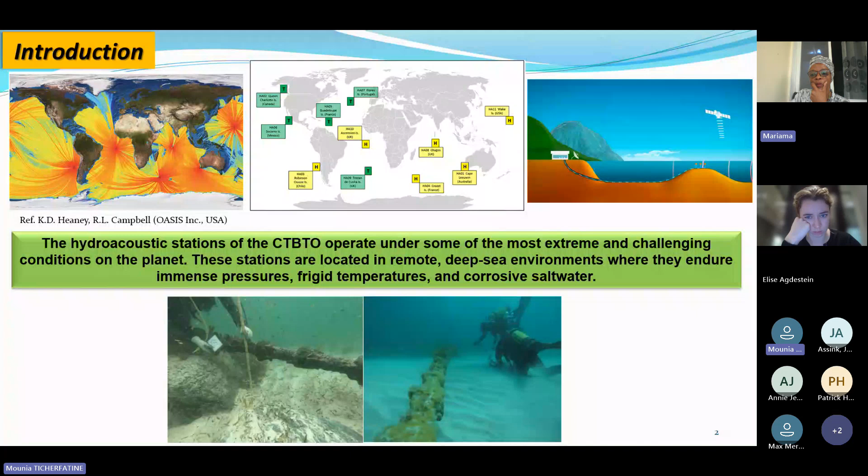Therefore, sustainment actions are crucial for preserving the operability of the CTBTO's hydroacoustic stations. Most importantly, regular maintenance, timely repairs, and technological upgrades ensure that these stations continue to function effectively, providing accurate and reliable data. So it is only by addressing this area that the CTBTO can maintain the integrity of its global monitoring system, ensuring continued compliance with the comprehensive nuclear test ban treaty and contributing to international security.

Of course, these sustainment activities are conducted in relation to the on-land outside plant equipment and the underwater system.

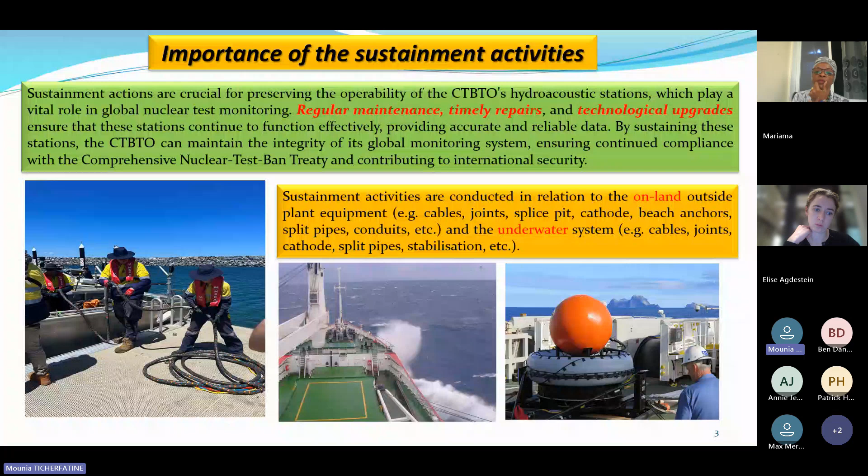So here we address the problem of corrosion. According to our understanding, corrosion remains the most challenging condition faced by the hydroacoustic stations. Indeed, the accelerated degradation caused by corrosion poses a severe threat to the structural integrity and operational reliability of the stations. Traditional materials and protective measures are proving insufficient in this hostile environment, making the development and implementation of advanced coating materials imperative. These cutting-edge coatings must be engineered to provide exceptional resistance to corrosion, ensuring the long-term durability of the station. So it is by addressing these challenges that we can secure the continued functionality and effectiveness of these vital components in global nuclear test monitoring.

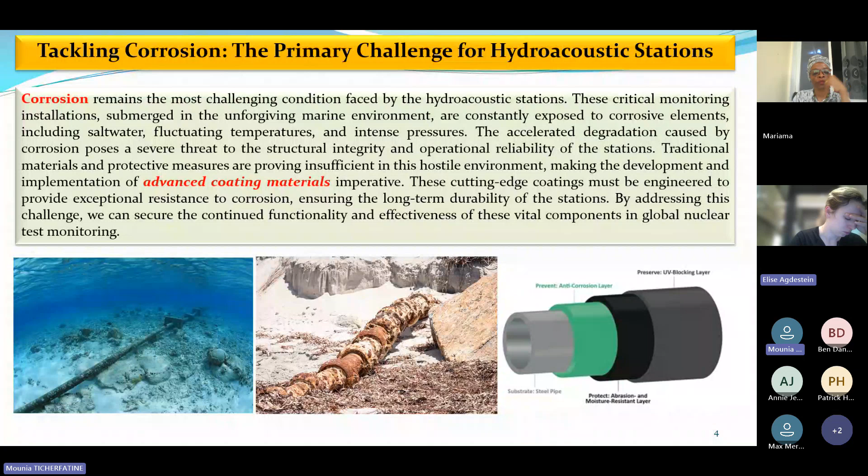Now, let's talk about superhydrophobicity and the role of superhydrophobic coatings in addressing corrosion issues. Superhydrophobic coatings are characterized by their extreme water-repellent properties, offering a promising solution to the pervasive corrosion issue in hydroacoustic stations. Typically, these coatings create a surface that minimizes water contact by causing water to bead up and roll off, significantly reducing the likelihood of corrosion-inducing moisture accumulation.

This water-repellent behavior is crucial in marine environments, where constant exposure to salt water accelerates the corrosion of submerged structures. In addition to water resistance, superhydrophobic coatings can also reduce the adhesion of marine organisms, such as barnacles, which contribute to biofouling and further exacerbate corrosion. So by preventing both water ingress and biofouling, these coatings can enhance the durability of hydroacoustic stations, extending their operational life and reducing maintenance costs.

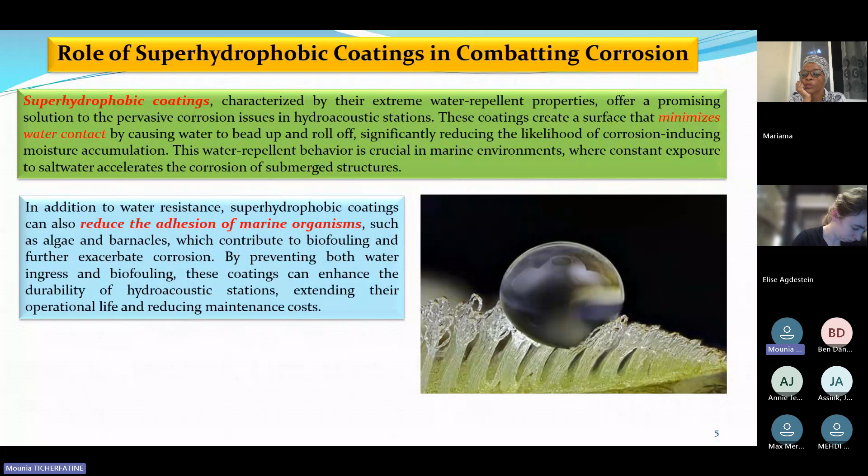So now let's discuss the science behind it. What is superhydrophobicity? Superhydrophobicity is closely related to the water contact angle, the WCA, defined as the angle where a liquid-vapor interface meets a solid surface. According to the WCA value, we can define if a surface is superhydrophobic or not.

For instance, in the upper figure here, the surface is superhydrophobic when the WCA is between 150 and 180 degrees. It is hydrophobic if the WCA is between 90 and 150 degrees. And less than 90 degrees, it is hydrophilic or superhydrophilic.

Superhydrophobicity was initially discovered in nature, as we can see here from the SEM image in the bottom left. We can see superhydrophobic surfaces at low and high magnification of a lotus leaf. Here we have a WCA of 162 degrees, which is a superhydrophobic surface.

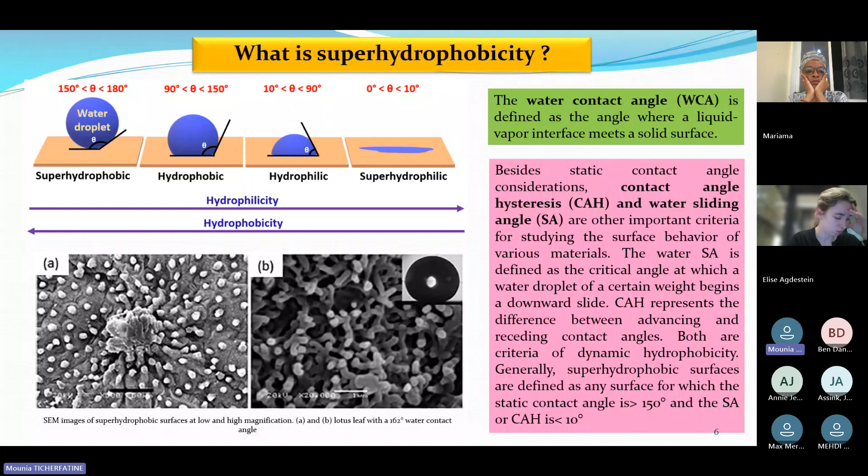Now, how is this superhydrophobic surface fabricated? Surface chemical composition and surface roughness are the key factors contributing to the formation of superhydrophobic surfaces. There are many methods and techniques to create roughness, followed by modification to achieve superhydrophobic surfaces, such as templating, etching, hydrothermal synthesis, anodization, electrodeposition, and most importantly, nanocomposite spray coating.

Nanocomposite spray coating offers a cost-effective method for creating superhydrophobic surfaces. By using advanced nanomaterials, this technique achieves high-performance water repellency at a low cost compared to the other methods. It provides an efficient and economical solution for developing durable hydrophobic coatings across various applications.

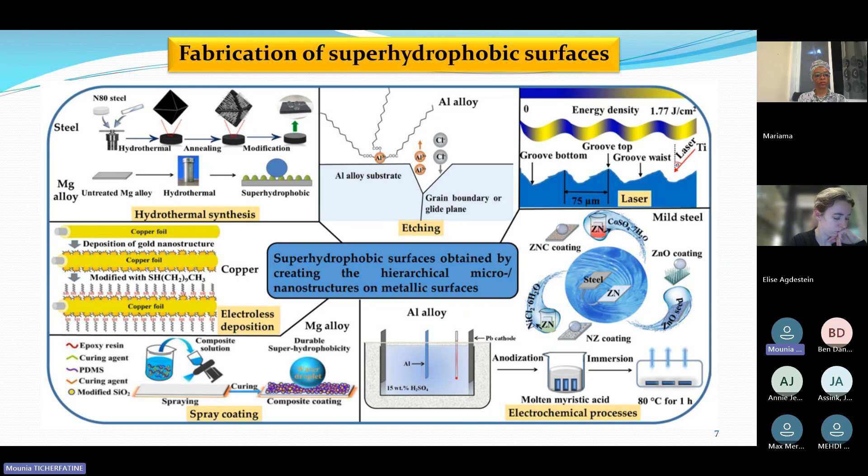Let's now move on to the specific case study we performed recently. As I stated in the previous slide, the nanocomposite spray coating can be seen as the most adequate and cost-effective technique to achieve superhydrophobic coatings.

In this case, a new nanocomposite was developed using a high-performance phthalonitrile resin and surface-modified titanium oxide nanoparticles. The phthalonitrile resins are considered one of the most advanced thermosets, featuring exceptional thermal stability over a wide range of temperatures, very low water uptake, a high cross-linking degree, and most importantly, a low melt viscosity and large processing window, which allows the preparation of nanocomposite through the spray coating technique.

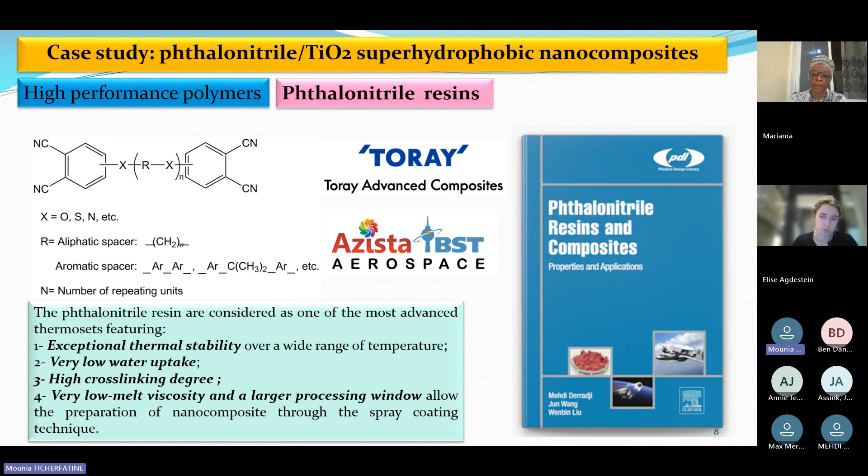Here, the phthalonitriles are synthesized by a simple nucleophilic displacement of a nitro substituent activated by the cyano functions. A multitude of possibilities are available by changing the phenolic precursors in order to tailor the final properties of the polymer. Meanwhile, the use of environmentally friendly precursors like eugenol, cardanol, among others, allows the development of biopolymers displaying the same or better performances than their petroleum-based counterparts.

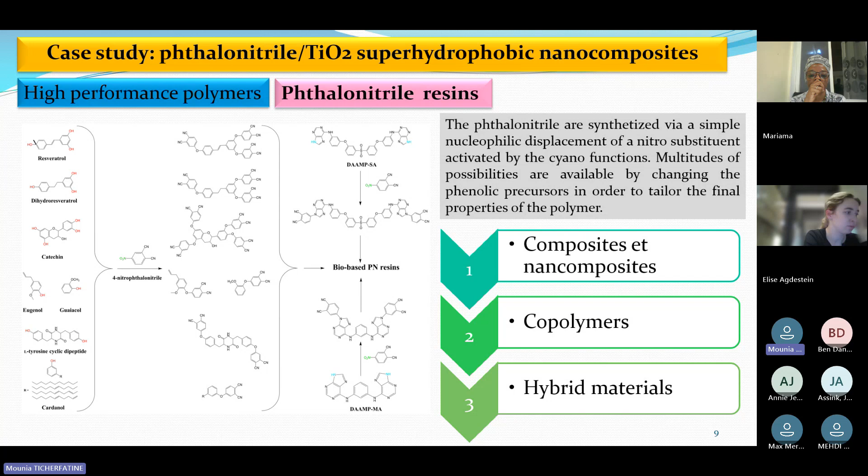Prior to the nanocomposites preparation, a chemical surface modification is applied to the titania nanoparticles to improve their adhesion and dispersion within the polymer. The silane surface modification of titania nanoparticles also enhances surface hydrophobicity by bonding hydrophobic organic chains to the nanoparticle surface. The silane molecules react with hydroxyl groups on the titania, forming a hydrophobic layer that repels water. This modification reduces the surface energy of the nanoparticles, leading to decreased wettability and improved resistance to moisture.

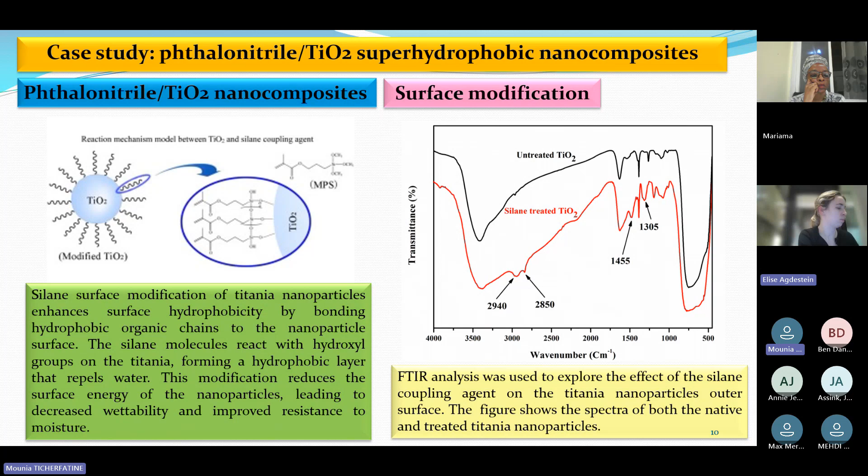Here, nanocomposites were prepared by adding the necessary amount of the treated nanofillers, ranging from 2 to 6% in increments of 2%, into a glass vessel containing a dissolved phthalonitrile resin. To assure better dispersion of the titania nanoparticles, the mixture was vigorously stirred using a mechanical agitator and then sonicated. The selected substrate used to assess the corrosion protective properties was a carbon steel panel. The deposition of the nanocomposite mixture was performed by a spray coating process. The final thickness of all coatings was about 120 micrometers.

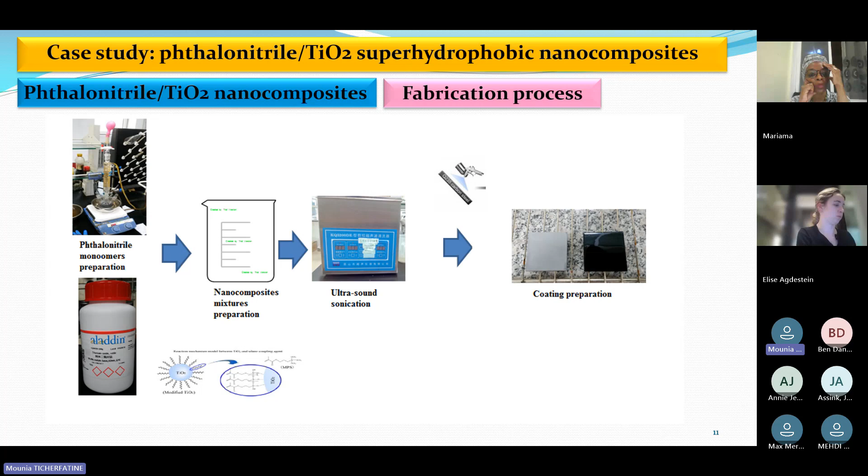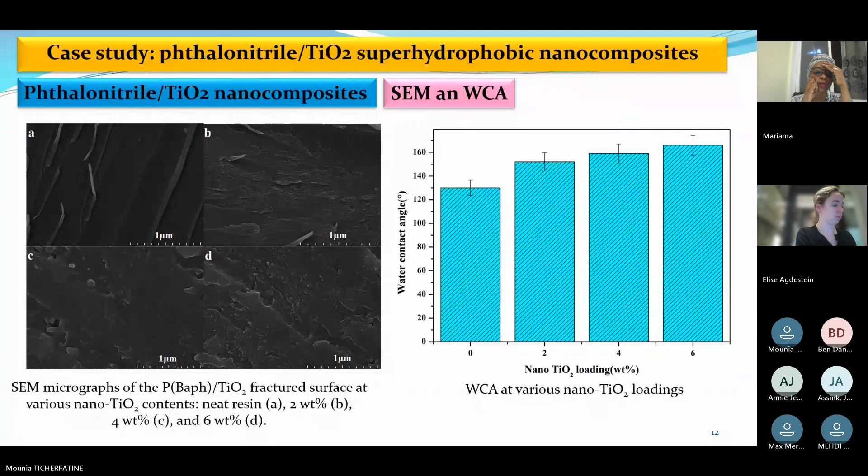The corrosion protective properties of the nanocomposite coating were tested using electrochemical impedance spectroscopy, EIS, measurements, which were performed on a potentiostat in a conventional 3-electrode cell. These measurements were taken at different immersion times over a frequency range of 100 kHz to 10 mHz.

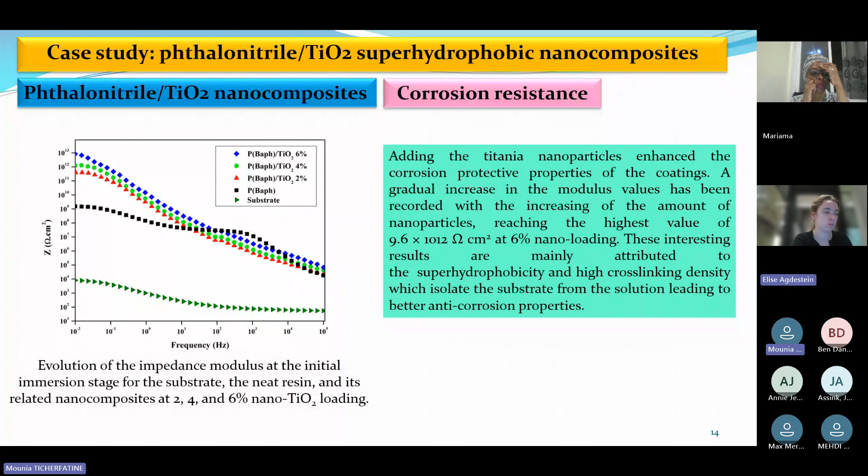The evolution of the impedance modulus at the initial immersion stage for the substrate, the neat resin and its related nanocomposites at 2, 4, and 6% nano titania loadings is presented in this figure. The findings showed that adding the titania nanoparticles enhanced the corrosion protective properties of these coatings. A gradual increase in the modulus value has been recorded with increasing amount of nanoparticles. These interesting results are mainly attributed to the superhydrophobicity and high cross-linking density, which isolate the substrate from the solution, leading to better anti-corrosion properties.

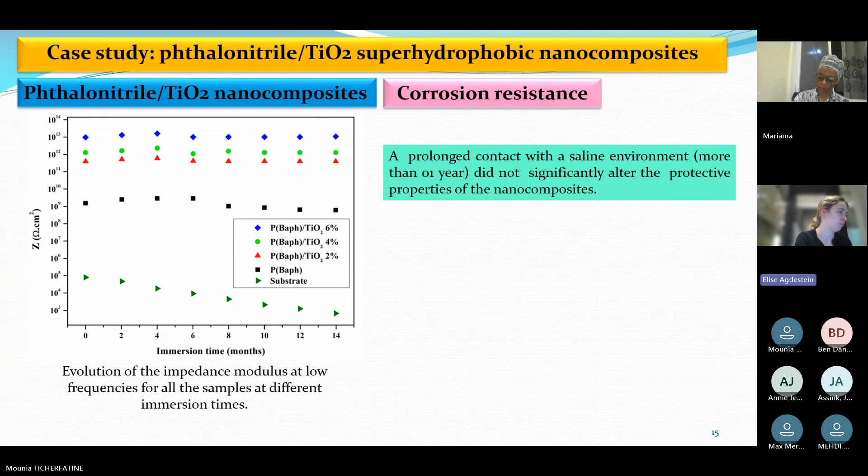Here, the mechanical resistance was investigated because in deep sea environments, materials are subjected to extreme conditions, including high pressure, corrosive seawater, and potential abrasive interaction with particles or marine life. So a coating with high microhardness is generally more resistant to deformation under pressure, which can be advantageous for maintaining the structural integrity of the material it covers. Different nanocomposites showed much improved microhardness values as the amount of titania nanoparticles increased. In fact, the maximum microhardness value, reaching 500 megapascals, has been recorded at 6% of nanofillers.

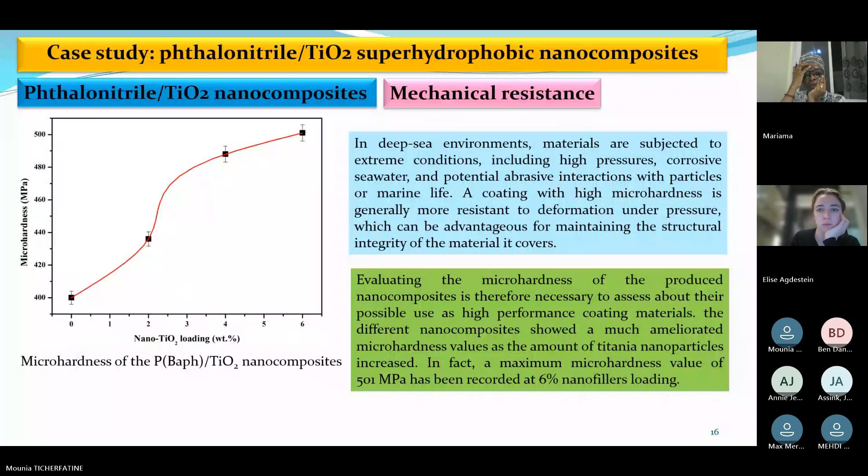Also, thermal properties were investigated, since coating materials for deep sea applications must endure extremely low temperatures while maintaining their structural integrity. Thermostability performances assessed by thermogravimetric analysis confirmed that the nanocomposite coatings retain their structural integrity over a wide range of temperatures from -50 to 500 degrees Celsius.

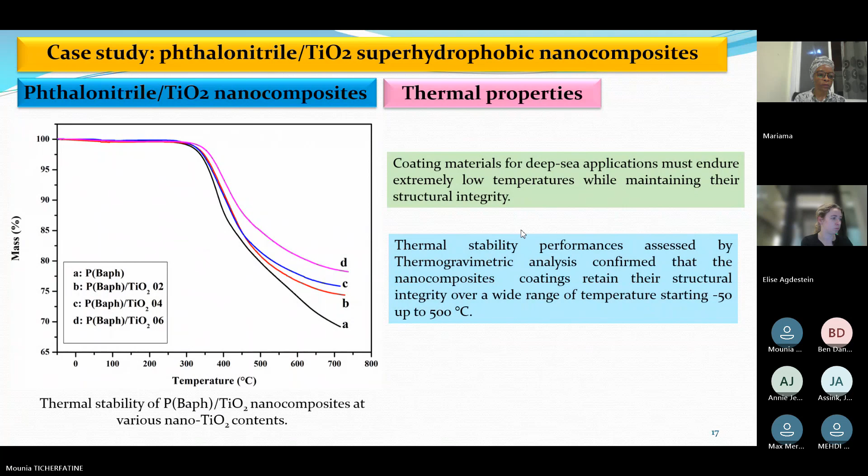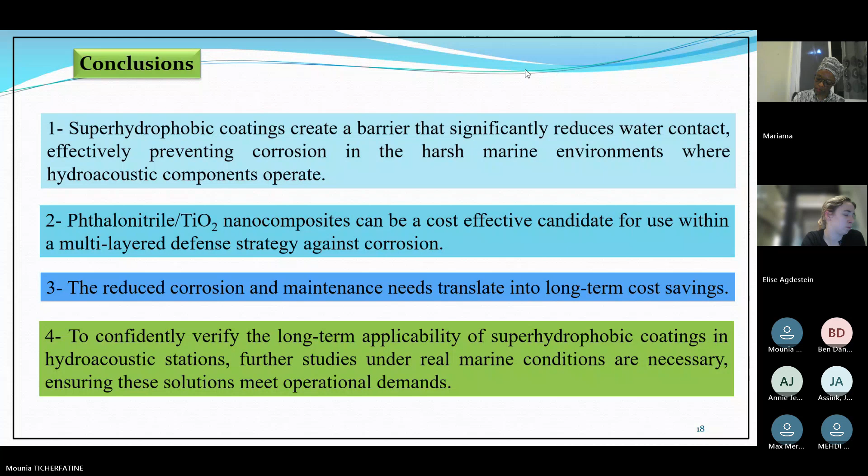And we would like to thank you very much for this title, because in different presentations, workshops or conferences, we mainly see subjects like data analysis, research on the subject, and so on. But today you showed us something very interesting: how to maintain the network itself so that it works efficiently, in terms of the hydroacoustic network.